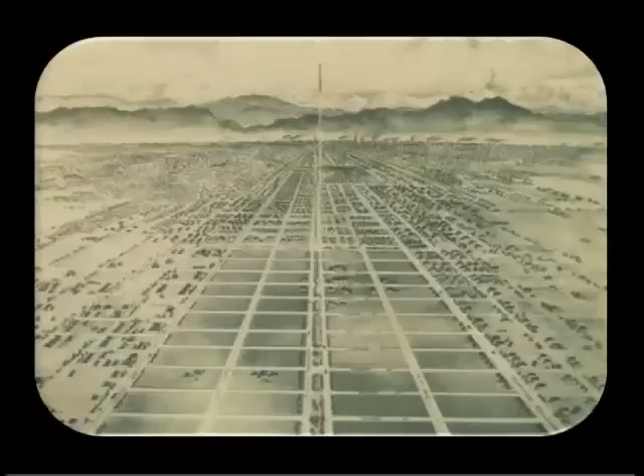Looking at one of the more specific principles, here's one that has to do with street networks. They wanted to extend the surrounding street and block configuration into Stapleton. Here's a picture I saw from, I think, the early 1900s in Denver, showing the extension of the downtown city block grid heading far out of the city. So the idea was to expand this downtown grid system out into the surrounding areas.

Did Stapleton do that? A little bit. We'll look a little closer at the street networks and what we have there now. You can see the shaded area is Stapleton, and here's a picture of the arterials going through it, the collector roads, and the local roads. Part of the reason for some of the less connectivity than you might expect is that there's a lot of parks going through Stapleton, so they are doing some things we want to see in these places. But you can see, in terms of the way they use the functional classification system, the extreme influence of books like the AASHTO Green Book.

So in terms of looking at what we ended up with, I wanted to compare some of the big picture things like the street network characteristics. Looking at street network density, it really wasn't too bad. It was nowhere near the density of a place like Portland, but more like a place like Berkeley.

In terms of street connectivity, this is what you'd expect with a fully connected network. A lot of our new urbanist communities are more like this: major roads with a little gridded block coming off them. It's a gridded network, but it doesn't function like a fully connected one. Stapleton is interesting because it's big enough to have multiple of these, with main arterials going right through the neighborhood instead of being outside the development, which is the case in most of our smaller new urbanist developments. They're very different in terms of how they function.

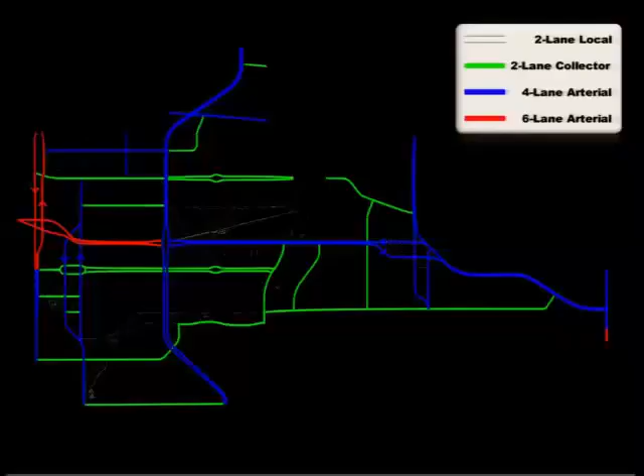Here's Stapleton again, showing how many lanes there are on some of these roads going through. In reality, there's only one road going east-west through Stapleton and one going north-south. So what does that mean for transportation planning? In conventional methods, we plan for how much demand there's going to be on these roads, then try to allocate that in terms of capacity.

So what do these roads end up looking like? Here's MLK Boulevard, the road that runs east-west, right through the heart of Stapleton. You can see 3 travel lanes and 2 turn lanes, with a speed limit of 35 miles an hour.

This is probably a more typical cross-section for Martin Luther King, with 2 lanes in each direction, each set of 2 lanes 30 feet wide. How fast are cars going on the street? Pretty fast. Looking at the speed data I collected, more than 18% of the cars are going faster than the speed limit.

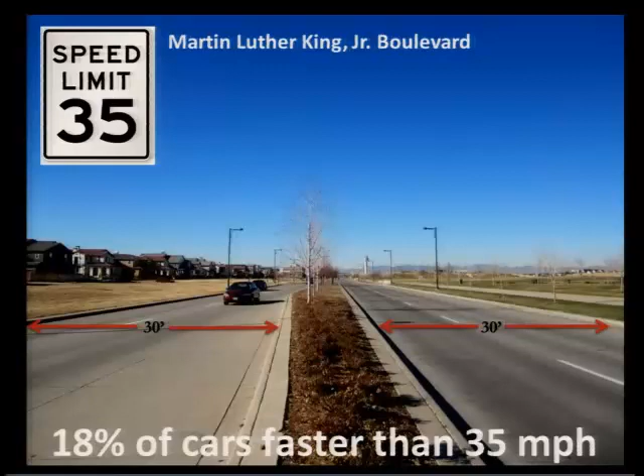Another road here is Central Park Boulevard, the north-south thoroughfare through Stapleton. Generally we have 2 11-foot lanes, a bike lane, a parking lane that nobody tends to use, and a turning lane, with a speed limit of 30 miles an hour. Looking at hundreds of cars going through here, 35% are going faster than 30 miles per hour.

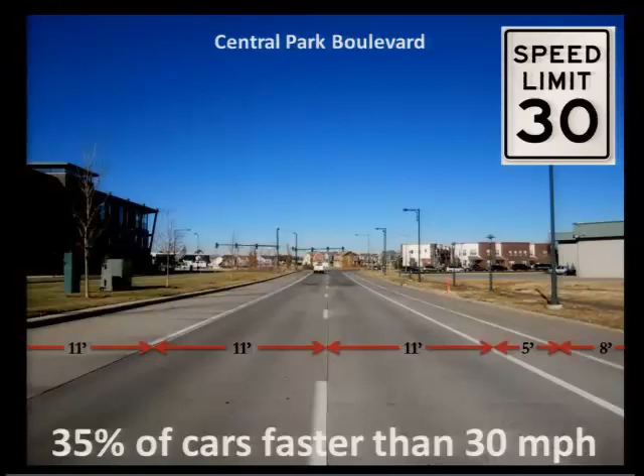Of course this has safety implications, and cultural implications for what people see this place being like. What ends up happening is we have these huge intersections where 4 or 6 lanes cross each other. You can see that intersection in the top left takes up almost a city block, and that's how big this intersection is in the heart of Stapleton.

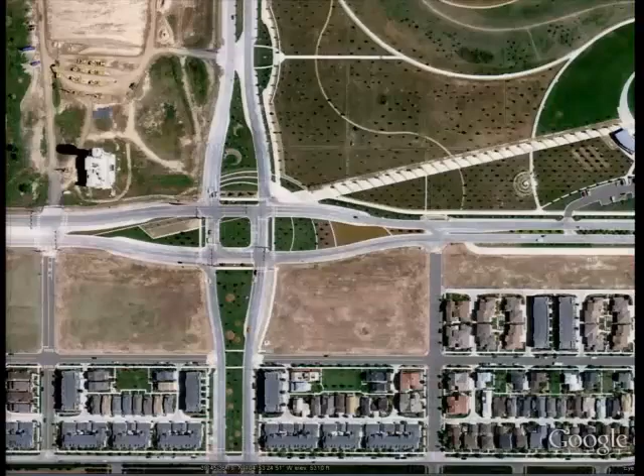Another influence I looked at was turning radii. Denver requires a 30-foot curb radius, and if you look at where the travel lanes are, they don't even consider that on-street parking and bike lanes make the effective radius much bigger than what's really being designed for—more like 70 feet. In reality, we should be using something like 12 feet or 6 feet. That intersection should extend into the street a lot more.

Another thing Denver does is require 25 feet clear on local roads for fire departments, with issues depending on the number of utilities in the street. I'm not sure how these roads got through, because there were a few roads with this 30-foot cross-section and parking on both sides, with a speed limit of 25 miles an hour. With parking on one side, 55% of cars go faster than the speed limit. In the few places I found, like the street where I live, with parking on both sides, only 3% of cars go faster than 25 miles an hour.

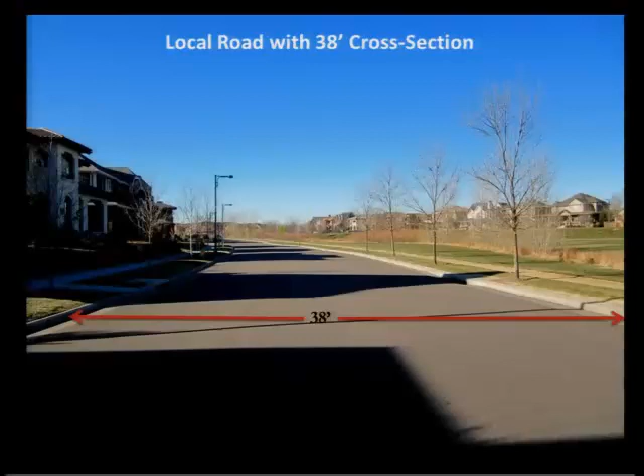A more typical local and collector road cross-section is 38 feet wide. On-street parking is allowed on both sides, but in reality few people use it since almost every house has a 2-car garage. Still a 25-mile-an-hour speed limit, and 64% of cars are going faster than 25 miles per hour on roads like this. Is that what we're looking for? Not exactly. So if we want these networks to be more connected, we need to combine them with streets that fit that.

Comparing that with Lowry, which is another new urbanist development, very similar numbers, but they have a lot more walking there, similar in terms of the other ones. But in our older, mixed-use type neighborhoods where they did this study, auto mode share is far lower. Of course, there are mitigating factors, and Stapleton will be connected to the commuter rail someday, so I think this will improve, but it's not off to a good start.

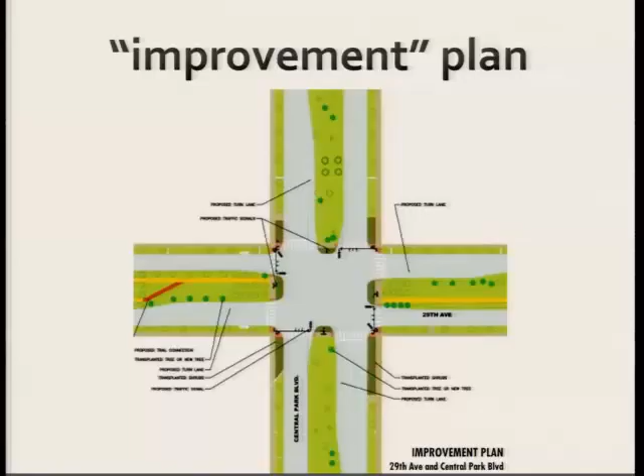Here's one of the intersections where we used to see that big median in the middle, and they tried to improve this by taking that out and putting a signal in. It's hard to tell how big that area of asphalt is now, but it's huge. You can see where that median used to be, and now you're crossing 5 or 6 lanes instead of 4.

So the reality is there are systematic issues, and really understanding these various influences and how the disjoint between them affects the outcomes is important. We need to have a better understanding of this.

One little tidbit I'll share: I did an interview for NPR back in the fall talking about these issues, and the author found a woman living in Stapleton who was talking about walking her kids to school and how much she would like to do that. She lives across Central Park Boulevard from the school, so instead of walking the 8 blocks to the school, she actually walks 8 blocks the other way to put her kid on a bus to go to the school.

This is right in the heart of Stapleton. If we're building new urbanist developments that cause these problems, in some sense we're failing.

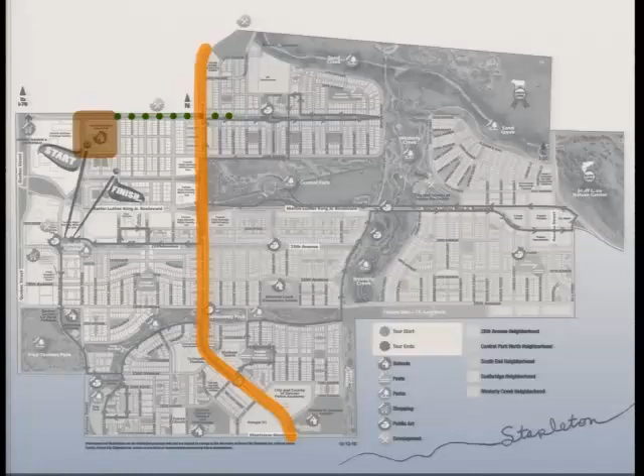This isn't what we're looking for. We need to do better than that. We need to focus on a lot of these different influences, and when I told Dan Burden about some of these issues, his comment was we need to focus more on community and not capacity. I think that's a good way to start. Instead of really taking these different influences and just trying to get it built, we need to understand what's going to happen, and that's what this study was really trying to get to.

And that's what I want to get across. So thanks for listening.

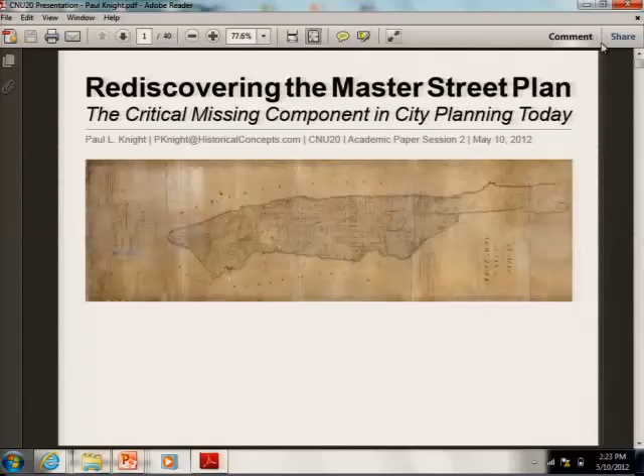So today I'm going to talk about the legal aspect of city planning and urban design. Now we all know that in the world of city planning, zoning is king, but we also realize that zoning is severely limited when it comes to creating good urbanism. So I'm here to help us rediscover this little thing called a master street plan, which originally was zoning's necessary partner in city planning.

In my paper I address four questions, but given these severe time constraints, I'm only going to go over the first two. What is the legal definition of a comprehensive plan, and how has that changed over time? And what exactly is a master street plan?

The way we practice city planning today has its roots in the 1920s. This was a watershed decade for American planning law. At the center of all the changes that were made were two documents, the City Planning Enabling Act and the Standard State Zoning Enabling Act. Now I'm sure everyone in here is familiar with the Zoning Enabling Act because it gave us our zoning ordinances, but I'm also confident that not everyone is familiar with the City Planning Act.

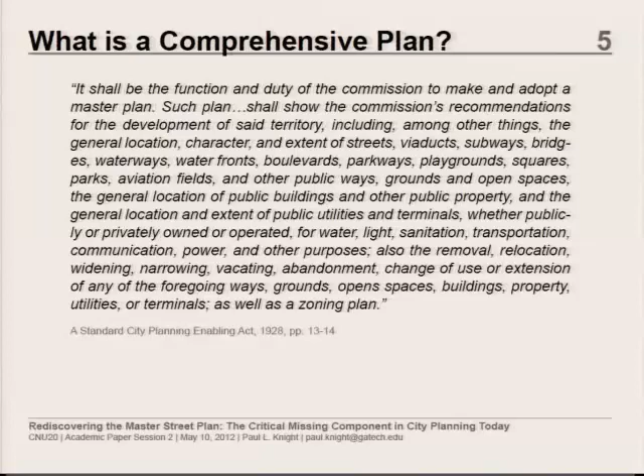So what does the City Planning Act say about a comprehensive plan? Now I'm not going to read this whole thing, but it states that a comprehensive plan shall include, among other things, the general location, character, and extent of streets, viaducts, subways, bridges, waterways, waterfronts, boulevards, parkways, etc. And at the end of this list, they mention a zoning plan. Now, while there's a lot of stuff listed here, it can be fairly easily categorized into public ways, public buildings, public property, public utilities, and zoning.

So just to make sure we're all on the same page, what is zoning? Well, the first sentence of the first page of the zoning primer, written in 1926, defines zoning as the application of common sense and fairness to the public regulations governing the use of private real estate. So zoning is the regulation of private property.

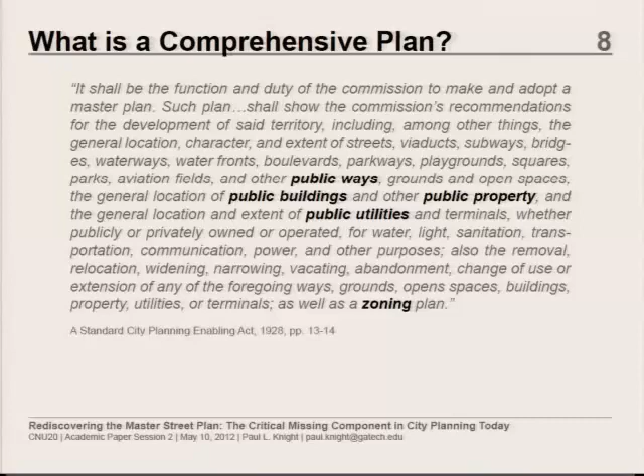So going back to our list, you see we have two broad terms we're dealing with: public property and private property. And if you read through these enabling acts, you realize this is exactly what they were each handling. The Zoning Enabling Act was handling the regulation of private property, and the City Planning Act was handling the location of public property.

Each one of these acts has an associated physical map. The Zoning Act has the zoning plan, and the City Planning Act has the master street plan. So the idea is that these two maps together comprise a comprehensive plan. But obviously that's not where we are today. We do not have a master street plan. We only have a zoning plan.

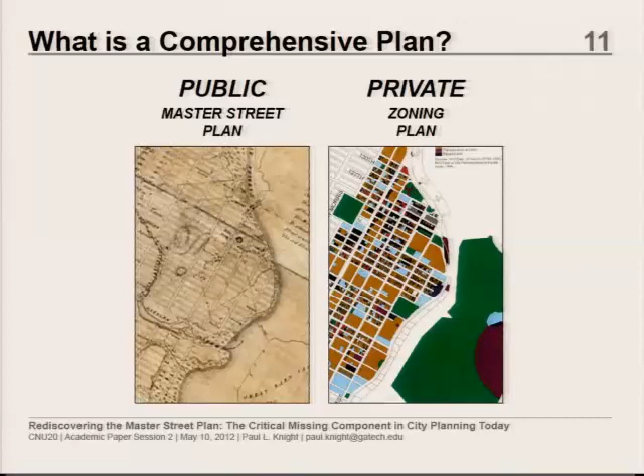Even though they tacked on zoning at the end of this list and even said that zoning is simply one phase of city planning, so what happened between 1920 and now?

I'm only going to point out one thing because this isn't a history lesson, but in 1947, in Bishop versus Board of Zoning Appeals of the City of New Haven, comprehensive plan was redefined by the court to be a general plan to control and direct the use and development of property in a municipality, or a large part of it, by dividing it into districts according to the present and potential use of the properties.

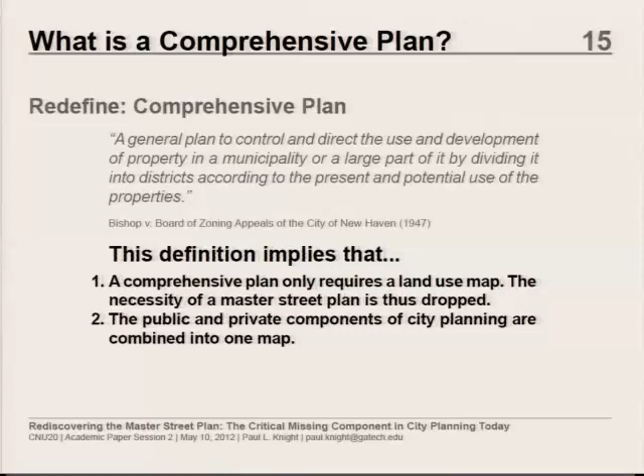That sounds a lot like a land use map, and it is. So by this definition, the master street plan was dropped. You no longer needed a master street plan to have a comprehensive plan. This propelled the zoning plan to the status of comprehensive plan in and of itself. But furthermore, it combined the public and private components of the city into one map, into the land use map.

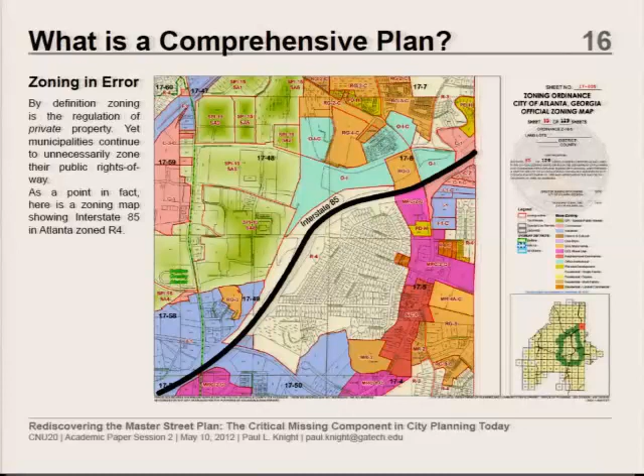And here we are today. This is a contemporary zoning map of Atlanta, and that black line in the middle is Interstate 85. Now notice that the right-of-way of Interstate 85 is zoned R4. So Interstate 85 in Atlanta is zoned residential, even though zoning is the regulation of private property. So it's moot for a city to zone itself. A city cannot apply police power upon itself, but they try to do it anyway.

And unfortunately, this problem has made its way into the new urbanism, into the SmartCode, and into Miami 21. Now don't get me wrong, Miami 21 is a great step forward. But if you look up the definition of civic, you'll find uses held in private or public ownership. So in casual conversation, it's fine to say that. You could argue that a privately owned restaurant serves a public purpose. But in legalese, you have to be extremely careful with how you splice these terms together.

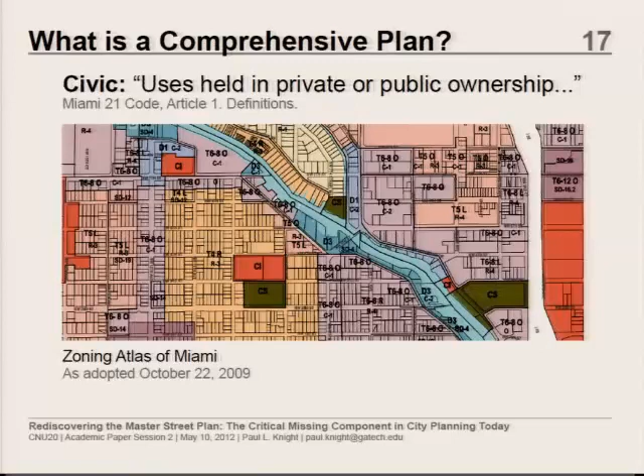And notice on the zoning map, or the zoning atlas, these green areas here, these are civic zones. So civic zones, a great example of an oxymoron in city planning. Okay, public and private, keep that in mind.

Okay, so here's the moment we've all been waiting for. What is a master street plan? This is a master street plan, probably the most famous example of a master street plan in history, the 1811 Commissioner's Plan of Manhattan, which shows the general location, character, and extent of streets. And that's all it shows. Nothing more, nothing less. But you can't build a city from this.

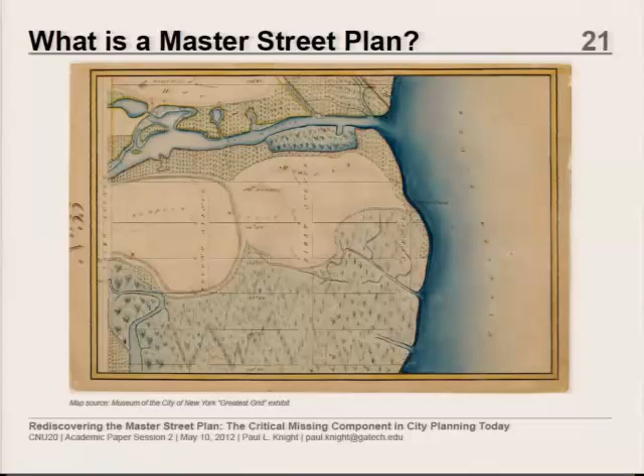This is showing the general intent of where they want these streets to go, so you have to survey it, which is what they did. So they produced hundreds of these surveyors' plats to project these future rights-of-way of Manhattan.

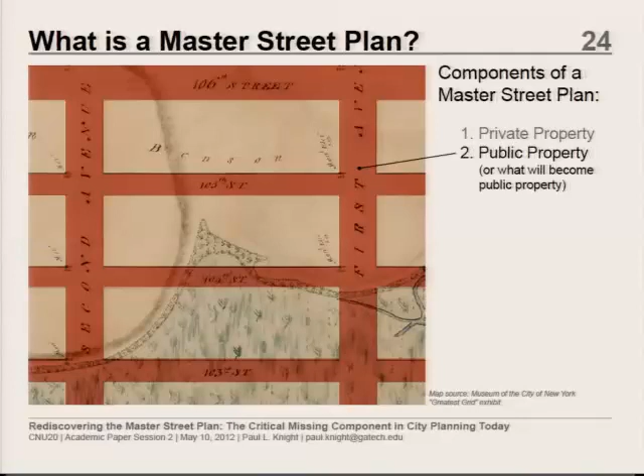So what are the components of a master street plan? Well, there are only two: there's private property, and there's public property. So private property and public property, where have we heard that before? Oh yes, our enabling acts. So these enabling acts were simply responding to the fact that our cities are composed of private property and public property.

Okay, so I'm calling this a master street plan, but a keen eye will notice that there are actually no streets drawn. There are no curbs, no street trees, no parking stalls, only the delineation between private and public property. Only the boundaries are drawn. So it's essentially a master right-of-way plan, but the intention is that these rights-of-way will become streets in the future.

Now, I know I'll be preaching to the choir here a little bit, but we all know that streets are important in terms of connectivity and walkability. But even more important than this, streets literally create property frontage. So they allow me to get to my front door, they allow me to go buy ice cream at the ice cream shop. They give a face to private property. So the more streets you have, the more access you have to your land resource.

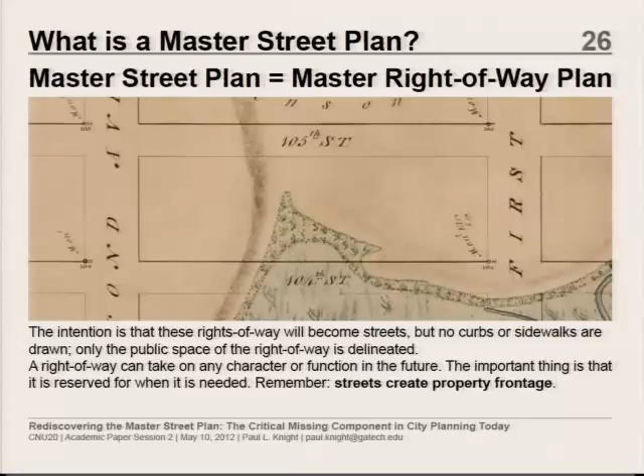So here's a 60-foot right-of-way at 105th Street in New York, and here's a 60-foot right-of-way at 381st Avenue in Minnesota. Now, you would not be able to distinguish between these two on a master street plan. They would be drawn in the exact same way. But their differences only materialize through zoning and economy. So there's the other piece of the puzzle.

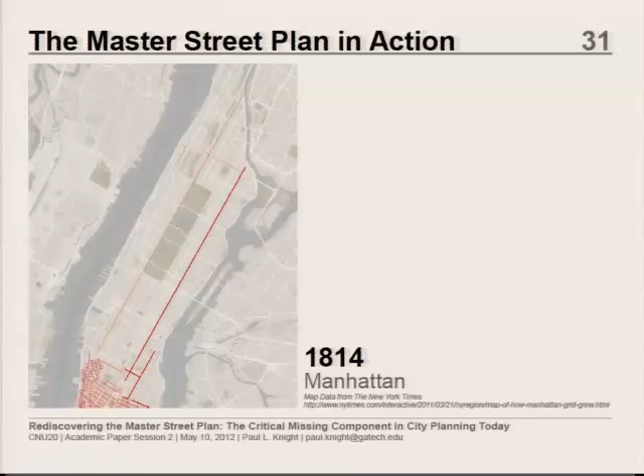Okay, I'm going to fly through this. I compiled this data from the New York Times, showing what streets were constructed when in Manhattan. In 1814, the streets at the bottom in red were existing. As I go forward in time, you can see how the streets simply filled in the master street plan up to 1942. That's 130 years for the master street plan of Manhattan to be realized. That is amazing—over political turmoil and the greatest migration of humans in history, yada yada yada.

So this can only happen with the master street plan. Forget the connectivity index, forget intersection density, street grid density—those do not work. I wrote a paper about that last year for CNU, you should look it up. You can only do this with the master street plan. It's the only way you can ensure up front walkability and all those things that we like.

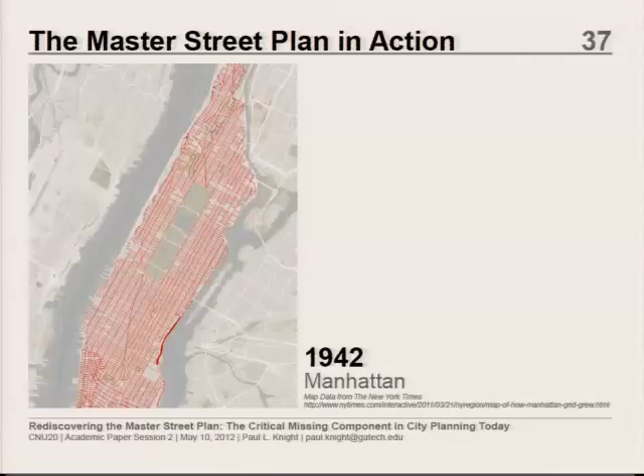So imagine if Manhattan instead had been founded on a zoning plan. It's not that hard to imagine—this is exactly what would happen. When cities are founded on a zoning plan, they are basing their infrastructure on a variable. Land use is a variable; it changes constantly over time. But the master street plan is that constant framework of the city.

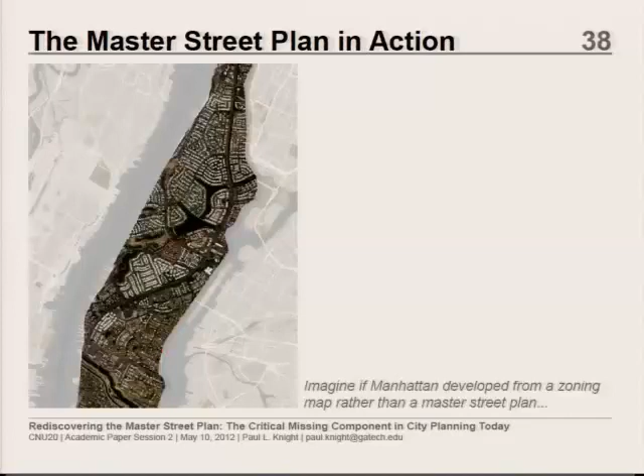So this is a near perfect analogy: construction documents are to a skyscraper as a master street plan is to a city. As an architect, banker, or developer, I don't care what floor the lawyers rent from me, or what floor the doctors end up. All I care about is creating a framework, a floor plate that can accommodate all of these uses over time. So the floor plate of the skyscraper is equivalent to the block in the city. The exact same block in Manhattan has accommodated wilderness, farms, houses, slum dwellings, and the Empire State Building.

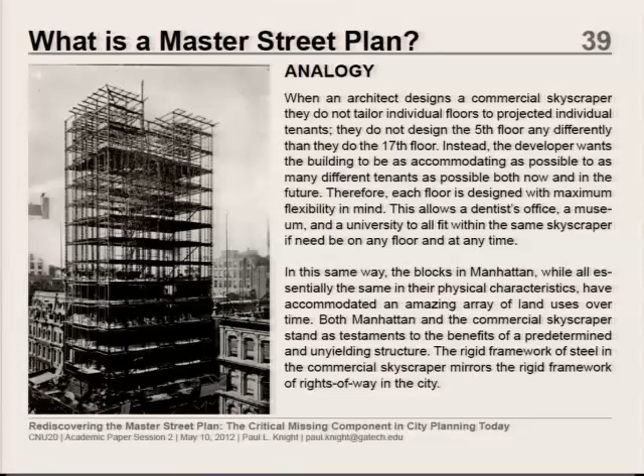So yes, it's very important. Okay, maybe I've gone too quickly, but to summarize: cities are composed of public and private elements. That's it. So to reflect this fact, a truly comprehensive plan requires two physical maps—a master street plan to show the future location of public property, and a zoning plan to regulate private property. A master street plan is a municipally established map, so it's established by the city. Don't confuse it with the developer's plat. I don't care if you have 1,000 acres—a master street plan encompasses the entire city.

And furthermore, it is executed incrementally. In the 1800s, Manhattan funded the master street plan itself and then passed that cost on to property owners. But in our time, developers develop streets and then cities come and condemn those streets. It works just as well with that development methodology. So that's all I had to say.

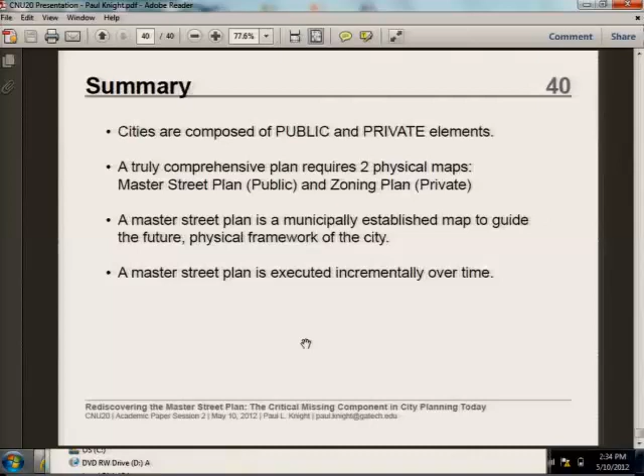I'm from Germany, and I teach at the Bauhaus University in Weimar. First of all, please excuse my English—I'm probably going to mess up words and use them in the wrong way, but I think the overall concept will be clear. I also work for a private institute in Darmstadt, close to Frankfurt, where we try to develop methods to assess urban qualities. Today I'm going to talk about the Venustas, the beauty, obviously. After participating in the Magic and Mystery Tour prior to this Congress, which I really recommend everybody do next time, it's very nice.

Is it too loud? No, not loud enough. Okay, so can everybody hear me?

We visited some of the great new urban developments in Florida, and I decided to put the focus of this short presentation on two main aspects I believe are important in the discussion of the new urbanists. In fact, I want to focus on the question of beauty and of the context in which we build.

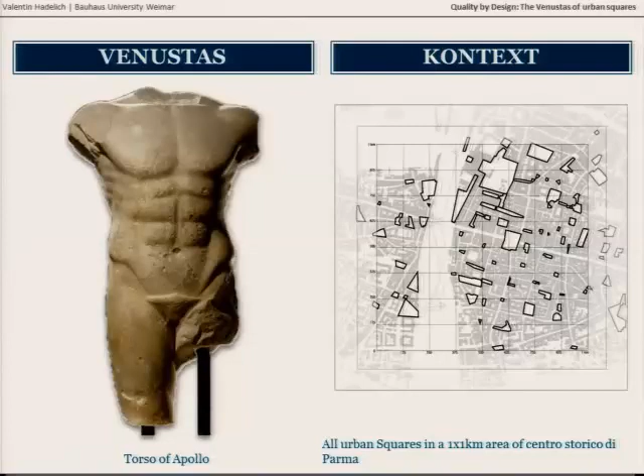So when assessing the atmospheric and overall quality of a square urban space, it is particularly interesting to note that certain spatial configurations have a similar positive or negative effect on their users. In the fields of perception, environmental, and aesthetic psychology in particular, much instructive research has been conducted into the effect of space on people.

So, for example, the quality of a square in terms of its spatial structure is different to the qualities resulting from adjoining uses or the functions to which the square itself is dedicated.

So we could say that there is kind of an underlying understanding of what is good or bad, or beautiful or not beautiful.

So what I did is I went out to Parma and other cities in Italy and tried to look at the context of these squares. Starting from a set of indicators that I had worked up before, I went there, looked up if they were working, changed them, and so forth.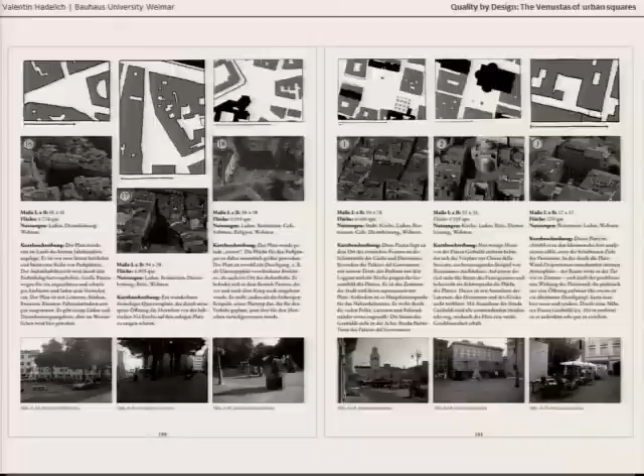So in the end, I had like 3 categories with 4 indicators that came together to define this assessment. It's maybe too much - I don't really know how to translate that method.

They cover 3 different scales and all aspects in the life of a square, like the context of the square itself and its uses, and the spatial formation of the square.

So at the macro scale, we have the indicators describing the integration of the square into the structure of the city and the quarter. At the mesoscale, its vitality and communicative potential, and at the micro scale, its spatial elements and their respective configurations and emotional impacts on the user. So each of these 3 scales of analysis has 4 quality indicators, as I said before.

So to emphasize how important I think the context is, many of the new urbanist projects we have seen so far in this presentation have a certain size, and then we can look at them in a certain way, but usually what is around is just around.

So what I have here is the definition of integration as the first category. For an urban space to properly be part of a whole - it must be highly integrated on different levels with its close context, the quarter and the district.

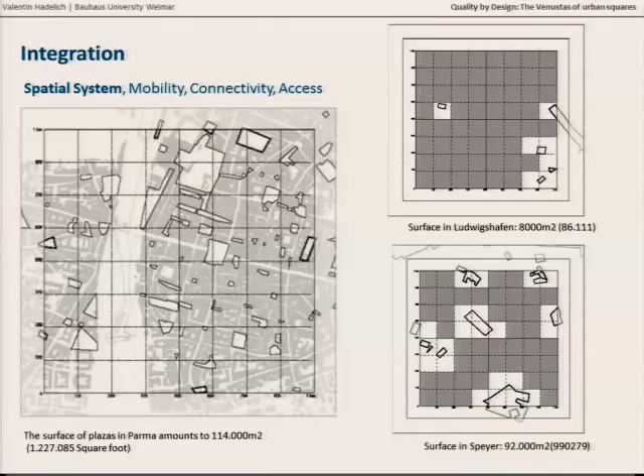So if we talk about the size of public squares, we don't only talk about the size of 1 or 2 squares, but also the amount we have, where they are, and how they are distributed and connected. The factors that have the biggest impact on the vitality of a square describe the elements that influence social interaction, the ways in which the space is appropriated by its users. The key indicators are outward focus, dialogue, character, and so on, meaning the orientation of the plots, the houses, the entrances, functions on the ground floor.

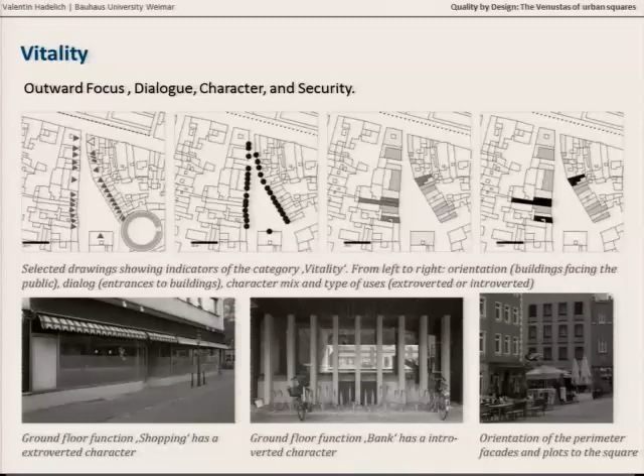Is this an extroverted or introverted function? Is it public or private space? The spatial quality is, I think, maybe the most interesting, and also the one that stays even if function changes. The surrounding can change, but the built form is the one that stays.

So coming from Lynch and how he understands and describes the city and how we can use it, I try to develop these three qualities: centrality, directionality, and enclosure. So how focused is a square or place, does it have a direction giving a certain tension, and how closed is it actually.

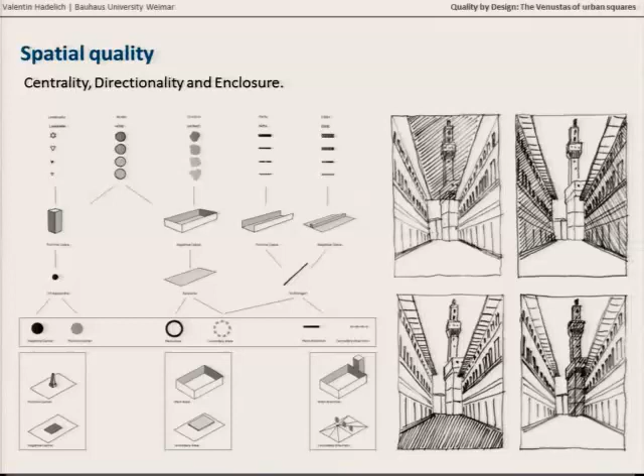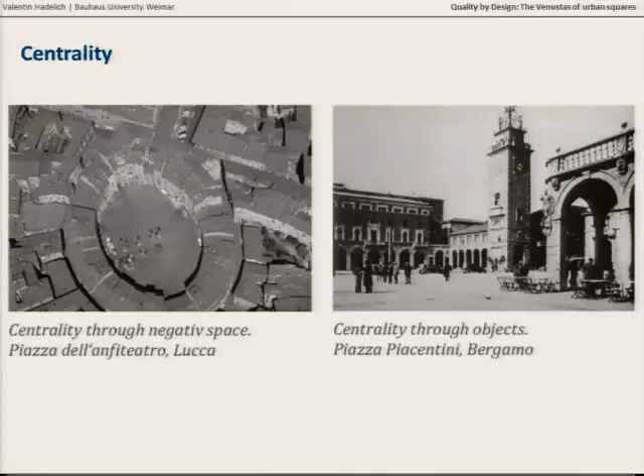I'm not going to go into detail there because I think I'm talking too slow. So centrality, just some pictures, is created through the introduction of mass-built objects or point-like elements within the space. Then directionality, of course, objects pointing or walking lines, the size of a square has a direction or not, repeating elements on facades and so on. Of course these are just examples. I have a catalog of how this is done, and there are many more possibilities.

The enclosure is the same, so you can have really closed squares like the Place des Vosges, or squares that are open on one side but then held through columns or views, nature, whatever, giving them this kind of closeness.

So yesterday I did this 202 workshop, which was very great, I liked it a lot. And we walked through Clematis Street, West Palm Beach, and I took this picture.

In just maybe the last 2 minutes, I want to focus on the context here and what it actually means. We have this nice portion of Clematis Street, but if the context is important, and I just go up a couple of meters and look what is behind this one building that's nice, and this one street that's nice, it really lacks, thank you, any kind of context. So you have this one street, it could actually be any of these streets, there is nothing behind, and so on.

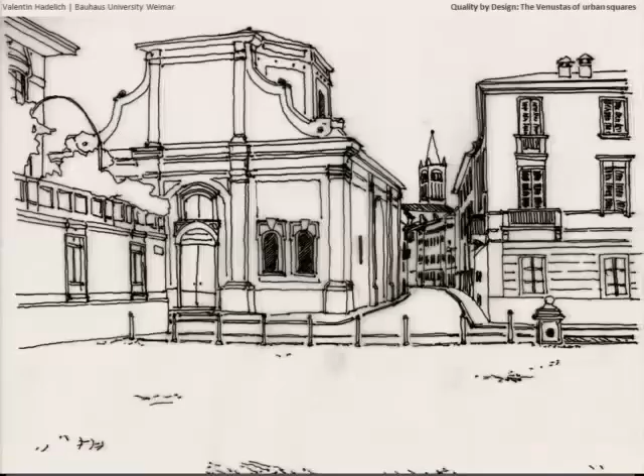Coming back to what we know or have maybe in Europe, we always feel like, okay, I have to stay here because if I go somewhere else, it's just going to be terrible. So the context here, for example, is Parma again. It's obviously a completely different one. So both spaces are beautiful in themselves.

So I can look at the street there and this street there, and they're both beautiful. But if I take into consideration this other level, I realize that there is so much more that I actually need. For example, this vista on the tower of this dome is actually the thing that gives this place the special character it has. I know where to go, I see things, and so on.

While looking at the papers that were online, I realized that we were all talking about streets, which I find very funny and interesting. So I decided to take a thing we did and bring it here.

So this is the same square kilometer of Ludwigshafen, and the red dots are all doors, like entrances into buildings. We can see the circle there is a new development they're doing. On the other side here we have a river, so this could be a beachfront for Ludwigshafen, which would be obviously fantastic. So we just signed in these dots.

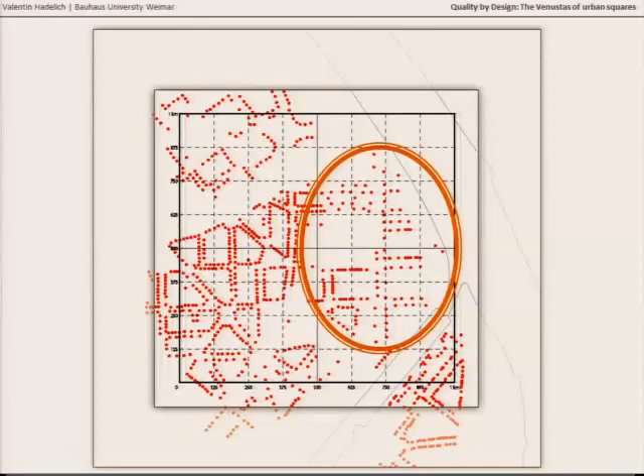Then we take the street network and see they're connecting the older part of the city to the river, there's a beach walk and so on. Everything is fine. If we then overlay these two things and connect them with a definition of a certain quality of the street—and I'm not talking about the width or how many lanes it has—but just taking, say, 25 meters between each door, and doors have to face the street.

Then we take out the streets that don't comply with a certain quality, and we see that this new development is never going to be connected to what we had, and that the people living there will never go to this part of the town. They will go up to the old city center or wherever they'll go, but not there.

So in the end, I have this very secret picture I took in a secret conference, secretly, obviously, and which is just giving us the formula of beauty in contemporary architecture. This was where Ernesto Nathan Rogers brought this down 30 years ago. It's obviously not even mathematical in any correct way, but I find it interesting that there is this strive for this formula. So if anybody wants to take a picture there, this could be his future.

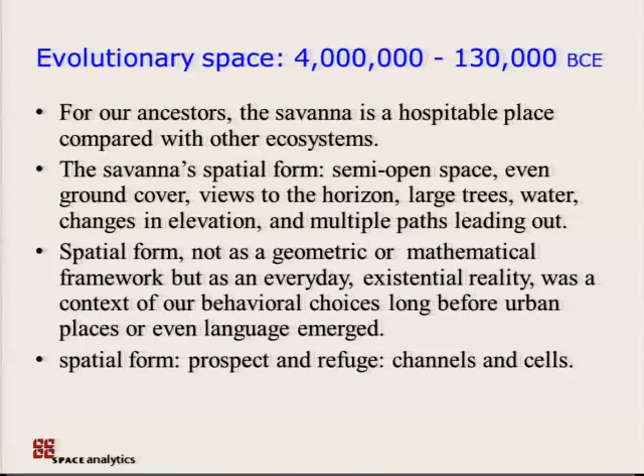The key notion here is prospect and refuge. J. Appleton proposed this, and I think it was 1976 his book came out. Probably a number of you are familiar with it. Obviously, prospect is an instance of unimpeded opportunity to see, certain spatial visual channels, and refuge is an opportunity to hide. There's a new urbanist development called Prospect on the edges of Boulder. Michael Chasey, an old friend of mine, actually came up with that term.

This genetically prepared learning, System 1 learning, System 1 thinking, is something that is extremely relevant to the way we make cities. The second phase is sedentary, what I call pre-urban space.

This occurred between 10,000 and 8,000 before the current era. Basically, it's staying in one place. It's the beginning of the end of nomadism, the beginning of the end of hunting and gathering. It's the beginning of agriculture. It's the beginning of trade. It occurs near the Fertile Crescent, in what's now Turkey, and what we see is that it involves property, communal property.

These earliest buildings emerged into permanent buildings. Here on the left is an example, a Moundang compound in West Africa. It's current, from current anthropological research, and it is very much like the kinds of compounds that existed thousands and thousands of years ago. The one on the right is Çatalhöyük, which existed from about maybe 9,000, possibly down to 6,000 BC.

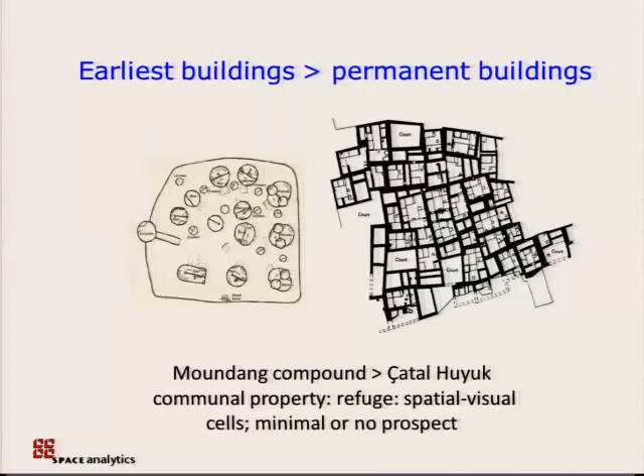5,000 years ago, it became pretty clear that places like Çatalhöyük couldn't work. These are tribal societies. Basically, all these people are families. People live in these dwellings. It's a lot like what you find in New Mexico. They live there for maybe 5, 10, 20 generations of the same family in that space. So you wind up with things like ancestor worship, the way the Romans had it, etc.

So what happens is that alluvial farming develops. Some people start to do things. The division of labor occurs. People start to make money, whatever they called it back then. Wealth increases. People want wealth. They move. So people from other societies, other tribes, start moving to these places that were doing great alluvial farming.

What happens is that you start seeing people around who don't belong here. You go, oh, there's a stranger. Oh, that could be dangerous. Who knows? Well, anyway, we still feel the same way in a lot of public spaces. So what happened there was that communal property became very difficult to manage. This is the way these kinds of places were.

3000 BC, Mohenjo-Daro in the Indus Valley, not too much different from other places in the Fertile Crescent. We have these spatial channels that are created by buildings, and what they do is they allow prospect. You can see who's coming and going. You can see who comes out of a door. You can see who turns a corner.

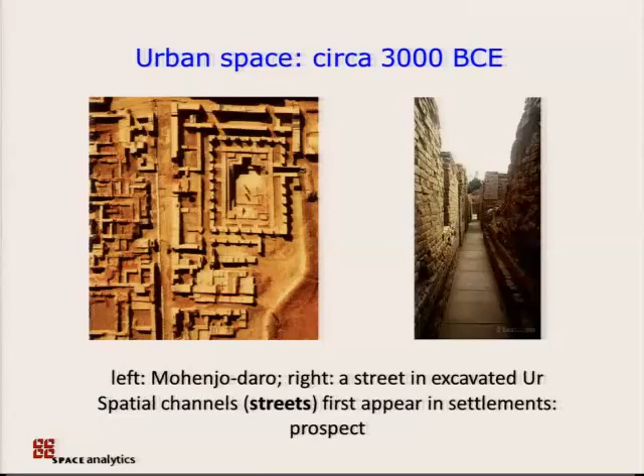So urban space at that time evolved because a new ruling structure happened—these tribes, these people got together and said, we need to do something better. What we need is more security. We need to know what's happening in our town. And so communal property was split into private property and public property. And public property was streets. And streets enable prospect, and therefore societies can exist that are more complex than tribal agglomerations.

So from that time, from the Fertile Crescent and the Indus Valley on, the majority of settlements worldwide have simple orthogonal patterns with rectangular cells, the buildings placed adjacent and perpendicular to rectilinear and deformed linear channels of streets. Why orthogonality? Well, that has something to do with the way we are. I mean, we are basically dominoes placed on end with a couple of legs that move us around. We're very different from horses and other animals like that. We have other characteristics that we find very interesting.

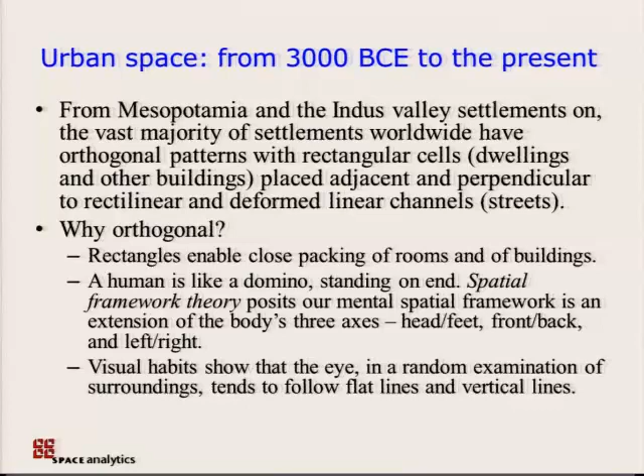Now let me shift to another story, three other phases: the moral design of American settlements.

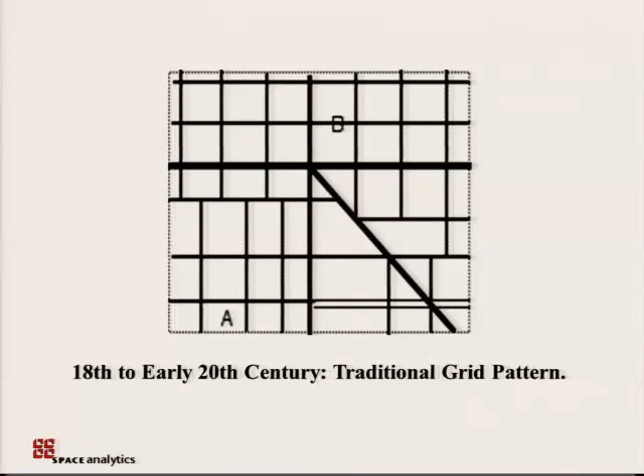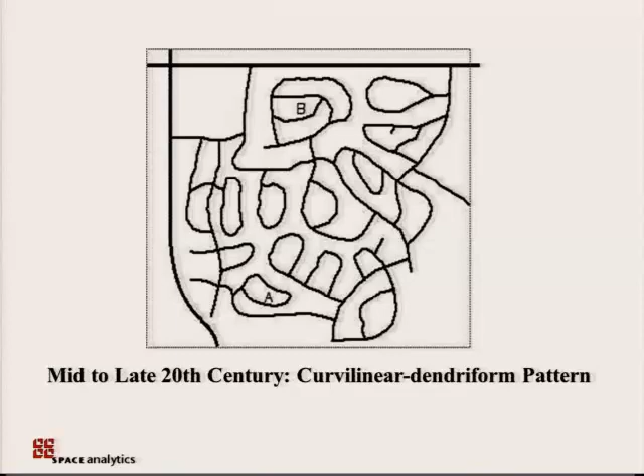We know what this is. This is really a composite of a variety of towns that we know. I took it from, I can't think of the name of this book, but it's a planning book. This is Riverside in Chicago. This is a suburb of, or actually a part of suburban Denver. You recognize these differences pretty easily.

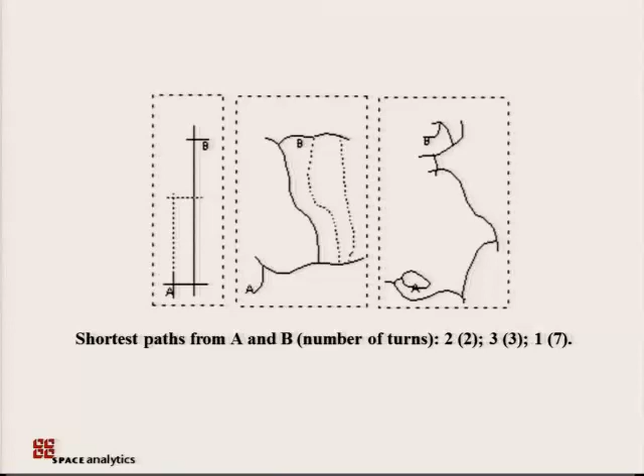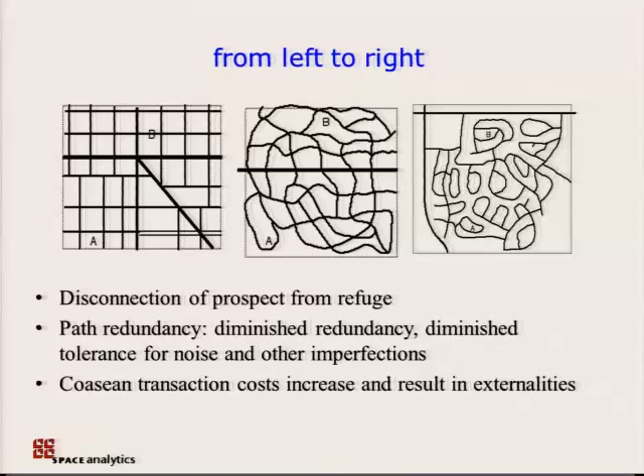I want to show here just simply about what's going on. This is something to do with connectivity and disconnectivity. The shortest paths from A to B: we see 2 paths with 2 turns, then 3 paths with 3 turns, then 1 path with 7 turns. Turns cost. So what we see as we move from left to right is a disconnection of prospect from refuge. We see what's called path redundancy from information theory, and we have an increase in Coasean transaction costs that result in externalities, the sort of things we have problems with today. We've been talking about property and space, and these overlap, but they're really not the same thing. I could give a lot more examples, but this is some of it.

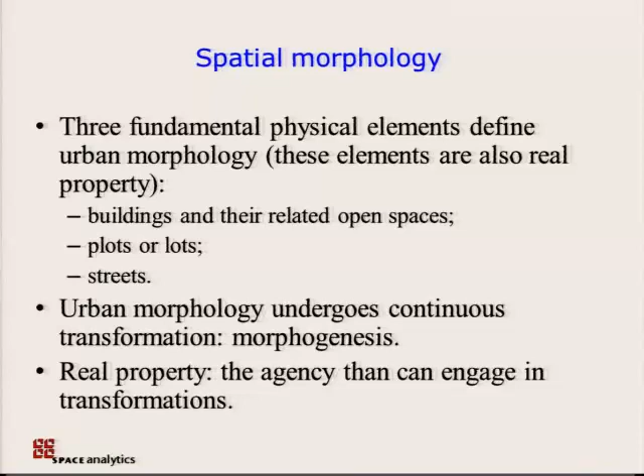I wanted to give an example of what happens when you don't deal with property. I'm sure some of you are familiar with space syntax. I used to be a managing director of space syntax. That was a long time ago, thankfully. There are certain claims made by space syntax, and they're based largely on this one example.

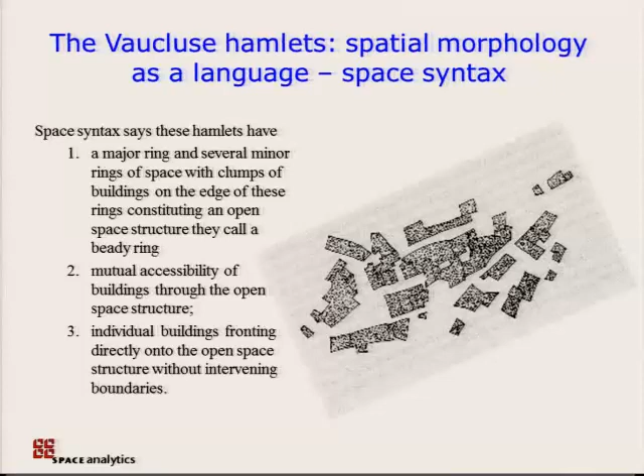There's a variety of hamlets in the Vaucluse in southern France that are described there. This is taken from the book The Social Logic of Space. Certain notions are associated with that. I wanted to compare that with these, which are obviously taken from a French cadastral map, but let's look at a real French cadastral map with the real information on it.

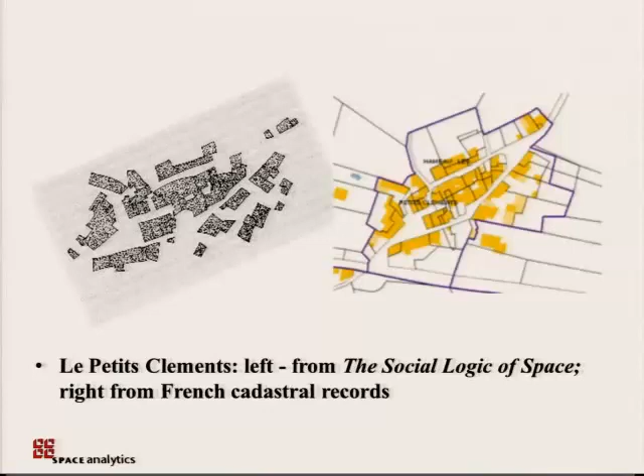And the real information has, as we all know from cadastral maps, property. So if you look at this thing with property lines, the heavier lines are the hamlet's legal borders. Then we go back and look: okay, let's compare this thing with property and look at what's really going on. Well, it's really a different kind of thing.

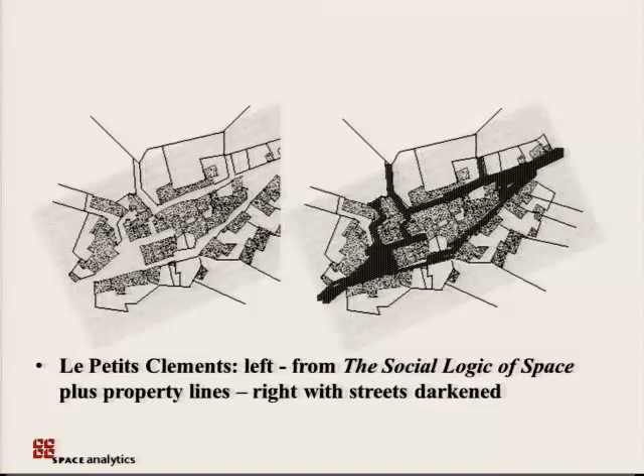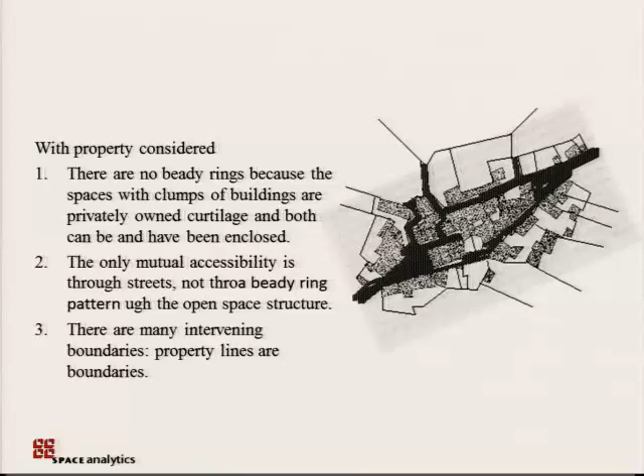If you really consider property, this whole theory falls apart. Completely falls apart. It's completely false. There cannot be any such rings, because what actually happens in all these places is people put up fences. It's become gentrified over the past 20 years, and people put up fences to keep other people out. So this flow of space is really minimized. I've been there several times.

So anyway, to conclude: spatial morphology is really the channel, not the content. Parcels of real property are extensively coterminous with the architectonics of built form, something we fail to appreciate. Verbal instruction can be problematic. Learning things in university can be a real disservice to city form, because System 1 can be overridden by System 2. And because people are complex, cities themselves need to be simple. That's something we have really missed, and I think some of the examples we've heard earlier today show that.

And because of collective real property, urban space continues to be evolutionary space by enabling the kind of creativity that cities have historically engaged in. Thank you.

Well, that was certainly an interesting group of papers. Quite unexpected. I was sitting here like the rest of the audience, wondering what was coming next. Perhaps we should start with questions, because I think we've seen an incredible variety of new ways of thinking about space. Todd Zimmerman asked me to remind you that his session tomorrow is about time. But we're not long on time, so are there any questions from the audience first?

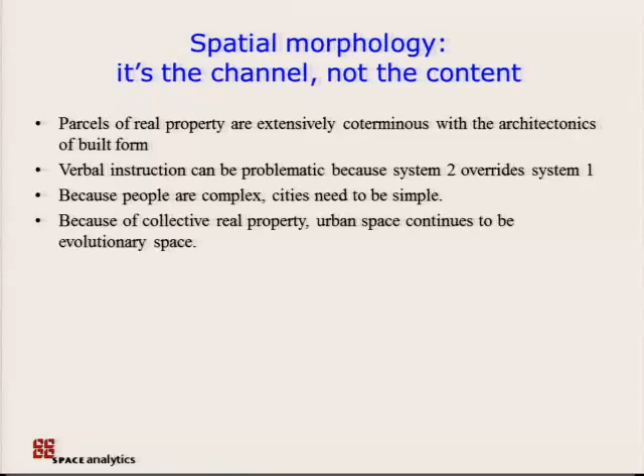In the Sun Belt, there are some areas where the public sector mandated the mile and half-mile connection—that's a Miami-Dade County law. The mile connection was put on the mile grid, on the Jeffersonian grid. The half mile was up to the developers, but at least there is that. This is going to be one of the major problems of sprawl repair: how do you overcome that lack of public connectivity in the midst of multiple property ownership. So thank you all for giving us a lot of food for thought.